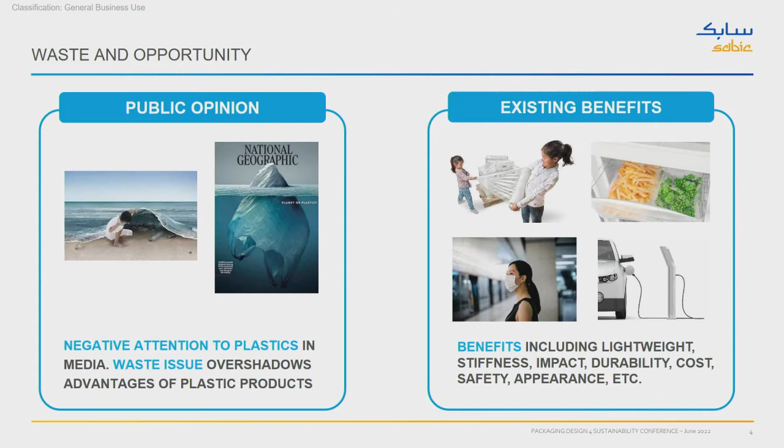Food packaging, you also see that here in the picture, the parts of healthcare, automotive. So lightweight possibilities. There are a lot of things possible with polymers in general. So it's not all bad. I think there are very nice examples in the market that can be made out of polymers. Of course, we need to work on circular economy. So we have some commitments to that as a supplier of polyolefins in the industry.

To do that, we've set up a program. We call it TruCircle, and it consists of different pillars. We have a portfolio pillar and a service pillar. The portfolio part consists of three parts. One is the mechanically recycled products, which I think was also touched upon. It's the real mechanical recycling of products out of the industry. Wash them, regrind them, and make new polymers out of it, new granules to make new applications out of it.

There are also two other ones, and they are also certified. I'll come back to that later. Certified circular and certified renewable. If we talk about certified circular products, that means if you recycle them from polymer back to polymer, that goes via the chemical recycling route. I'll show you an overview of that. And then you have the benefits. It's food contact approved. It's in spec. It's comparable to virgin resins, and you can make your new applications out of it.

Certified renewable, that's a different way. It's based on a different kind of feedstock. Usually we use oil-based feedstock. Naphtha in this case goes into the cracker, then into the polymerization plant. What we do with certified renewable products is we do not use naphtha as fossil-based feedstock, but we use a renewable feedstock. Most likely in these cases it's tall oil or, for example, used cooking oil.

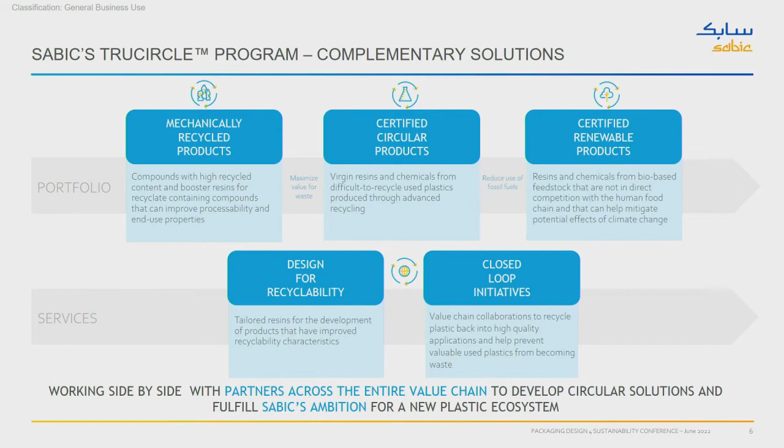There's also closed loop initiatives. If you do mechanical recycling, food to food is, from a legislation point of view, not possible at the moment. But in closed loop initiatives, there are ways to do that, and you can go from food back to food. Think about the PET bottles. There is also some milk packaging in the UK. So we have quite a thing to do in the whole value chain from that point of view to bring circular products in the market.

If we talk about the things I just listed, we also have some examples. Mechanical recycled products, you see there a bag of granules. We use that same bag where we sell the granules in. We take those bags back, we make new bags out of it, and we sell the granules in recycled bags. We call that bag to bag. The point is, the granules inside are not suited for food contact. It's automotive based, for example, but there is a way of recycling your packaging and creating a new one out of it.

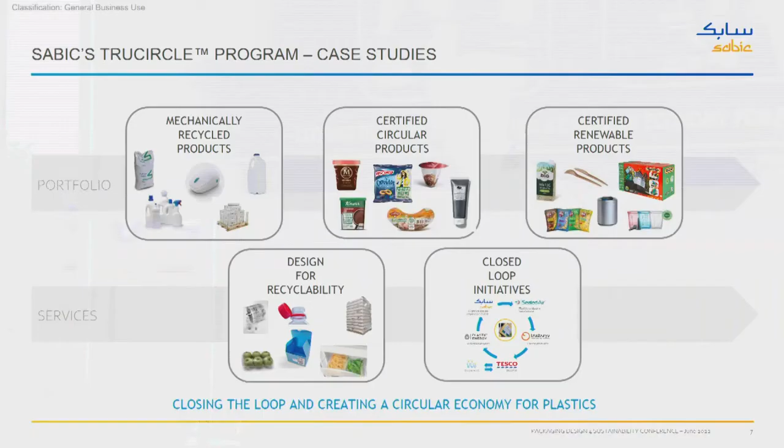You also see there, I hope you can see it, a mouse in the middle. It's created of plastics coming from the ocean. So materials are collected and are made into a new mouse. It's not food, but it's out there in the market. Of course, mechanical recycling, the whole bottles. I think that is known. And as I touched upon before, mechanical recycled stretch film used in the market.

There's also the part of the certified circular ones, based on the chemical recycled polymers we have. You see the Magnum cup, for example, on top there. There is also fish packaging. There's different ways where we can use advanced recycled products from polymers back to feedstock, back to new applications.

Also certified renewables. You also see some examples on the pages. I think they speak for themselves. There is extrusion coated paper, maybe not so good, a paper-plastic combination from the recycling point of view, but still there are people buying this and putting this in the market because of the CO2 footprint.

Services, as I mentioned before, design for recyclability. In my case I do application development, we try to develop new structures, new packages, new ways of combining polymers so that they are easier recyclable. We have some examples in here. It's a PVC-free cling film. It's an EVA-free stretch hood. So we try to design the whole package, the application in the end, so it's easier to recycle it in the next step.

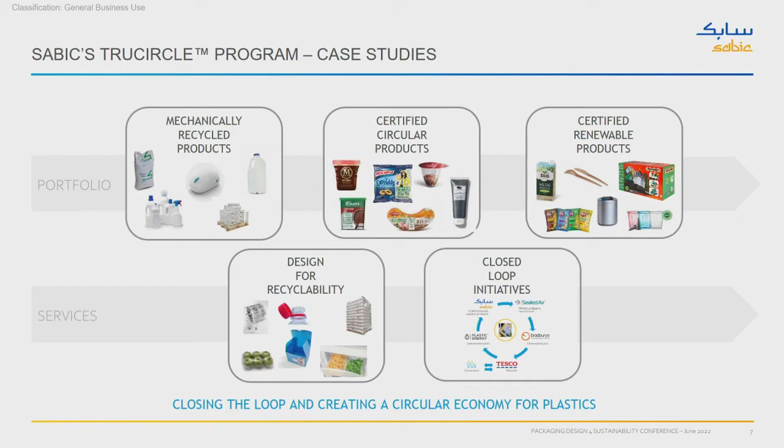Closed loop initiatives. I briefly touched upon that. You see that also here in the picture. It's a food packaging made by Sealed Air, goes into Tesco, is collected again and is then recycled food back to food packaging.

The point of the concept from linear to circular. What you see here on the picture is a schematic overview in principle of the process we talk about in our industry. You see on the left-hand side fossil-based feedstock. In this case, usually that's naphtha in our crackers. It goes into a steam cracker and then into the polymerization plant. So based on the oil, you crack it, you make small molecules out of it, and we polymerize them into bigger molecules.

Polymer plant, we have the granules, we sell them, and somebody makes a product out of it. Injection molding, extrusion, whatsoever. Converter makes a product and sells the product into the market. The product is used by the consumer. The consumer opens it, eats their salad, eats their sandwiches out of it. And then you throw it away. And then the interesting part starts.

Usually we had the energy recovery principle, burning it, bringing it back to CO2, or landfill. And that is a thing we do not want to have. So mechanical recycling is a great alternative: if you sort your waste properly, collect it properly, clean it, you can make a new product out of it. The problem you have in that case is it's not suited for food contact. As an alternative to that, we have, let's say, the bigger loop.

As alternative to that, we have the part of renewable feedstock, the bio-based feedstock, used cooking oil, tall oil from the wood industry, as alternative to naphtha. So we have in principle then two ways of putting a feedstock into the cracker. Three ways, you can say: from fossil-based, we go through the system, we go back in there, or we use a part of renewable feedstock that goes back into the system where we can repolymerize this and make new products out of it.

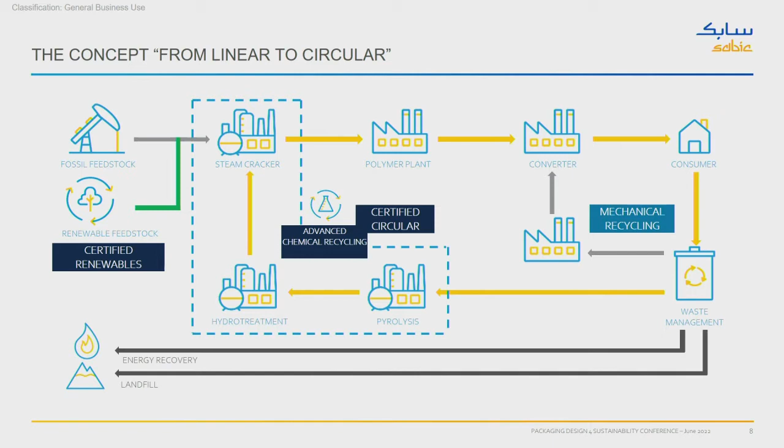Mechanical recycling, I just touched upon that. If you can mechanically recycle it, please do so, from a cost point of view, energy efficient point of view. But there is a lot of packaging out there. If you talk about food packaging, if you take the volumes, non-food versus food packaging is, I think, slightly bigger. Not to underestimate it. But if you mechanically recycle it, you cannot go back into food packaging. So, chemical recycling or advanced recycling gives you an alternative in that case.

If we talk about recycling, whether it is chemical or mechanical recycling, your packaging should be suited to be able to properly recycle it. There are some guidelines. I think everybody is aware of that, at least I hope. We don't want darker colors. We want not too many fillers, as was also touched upon before. The polyesters, polyamides, the multi-material combinations out there in the market are not preferred from that point of view. PVC, polystyrene are things we do not prefer to have in these routes.

It's the whole discussion on paper versus plastics. We have paper, we have coated papers, we have these packages with a plastic sort of window in there. Is it plastic? Is it paper? Where to put it? So there are some guidelines set up. CEFLEX has put some guidelines in place. Also Tesco has done that, and I think Tesco has done it in a nice way, in an easy way.

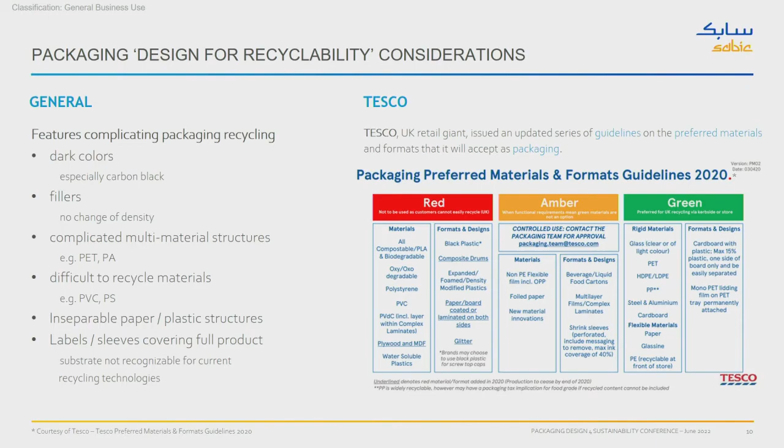It's like a traffic light, red, green, and amber. I think we all know when to cross the street and when not to cross the street. The green parts are the materials we prefer to have used, because then we can recycle them more easily. Amber is only needed when there are no alternatives, and red is the ones preferably not to be used.

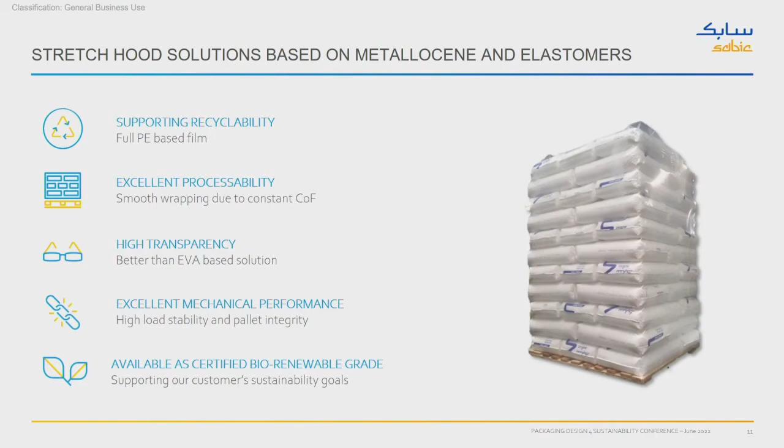PVC-free cling film. If you look in the supermarkets, there is packaging, there are apples, there are fruits in a tray, and there is this nicely elastic film. People know it also from the household wrap. If you have some leftovers, you put this film on top of it. In the household, what you use at home, the majority is polyethylene based, but in the industry, the broccoli packaging, for example, the majority used there is PVC based.

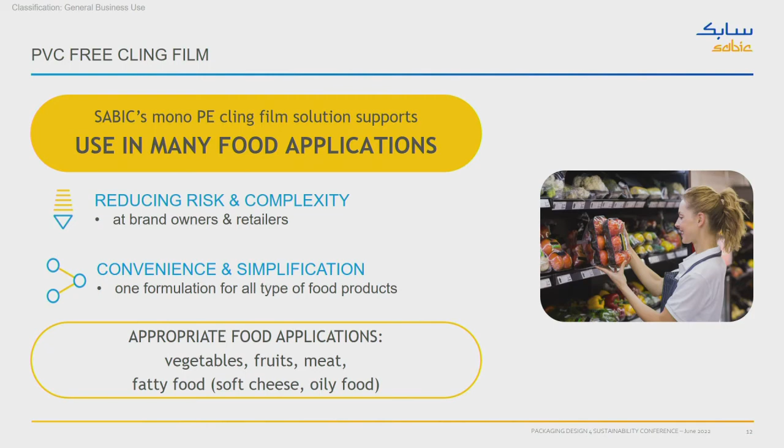And if you do recycling, PVC, the chlorine is a thing we do not prefer to have in the market. So what have we done? We've developed a PVC-free solution, also based on the polymers, that is suited in this market. So you can use a film in the industry, PVC-free based cling film. Of course, the clear food contact approval and so on is all there, is all given. It gives you some convenience. There are different types of PVCs depending on what you're packaging. We've developed a solution suited for all types of packaging.

Brings us to the next topic, design for recyclability. There's a lot of laminates out there in the market. I think we all know those, at least I hope. So what have we done? We've developed a new resin suited for biaxial stretching. I'm not sure if you guys are aware of MDO films, machine direction oriented films. There is also the BOPP, there's the BOPET, biaxially oriented polyethylenes, the PPs, etc. So a majority of those markets is out there.

What have we done? We've developed a new resin, polyethylene based, that can be stretched in two directions. Is that something special? I would say yes. It's not that straightforward. Also, Mila talked about the BOPE in the Musepark consortium. We're also part of that in the life cycle assessment, and also the BOPE is used in that case. What do you usually do in BOPE? You make a cast film. You see it's a relatively thick cast film.

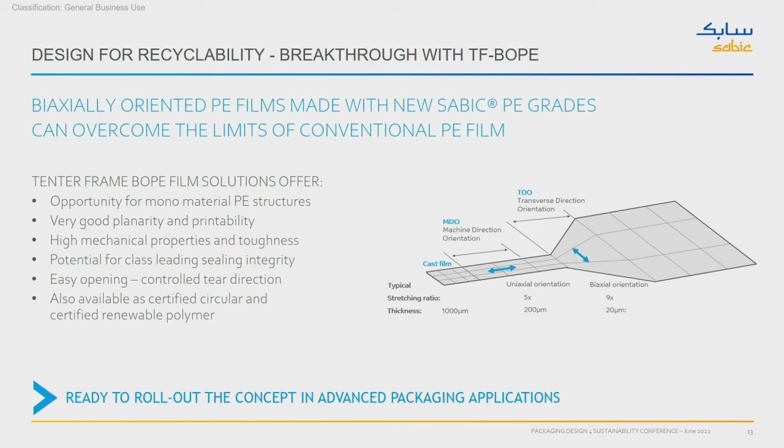It's stretched in one direction, machine direction, roughly 5 times, and then in a tenter frame stretched in TD direction, and then you go from, let's say, roughly 1,000 microns to 20 microns. So you have a very thin film. It's a very transparent film, a very strong film. Stiffness toughness balance is there, and it brings you, I think, very nice possibilities. This runs on commercial BOPP lines, so there's no need from that point of view to invest in new equipment. You can make use of the resin on your existing equipment in case you have it.

But then we need to do something with this film, this biaxially oriented film, and one of the topics is stand-up pouches. I think we see them out there. We have the ones for dishwash tabs, we have nuts, we have soup, we have liquid soap, you name it. The whole refill packs, it's all in this stand-up pouch. And that's, I think, an interesting market, an attractive market to use these oriented films.

If you look at that structure, if you try to simplify it, usually there's an oriented film on the outside. It's represented here in the red color. It has some properties, some needs. Usually what you see on the shelf, there is a print on top of it, so it functions as a print carrier. It brings you stiffness, it brings you optics, the shelf appeal, the appearance. It has to be glossy, it has to look nice. This usually comes from your outside layer, your oriented film. There's a print on top of it. We call that reverse printing because you look from the outside through the film to the print, so the print is protected from that point of view.

There's an adhesive in the laminate, and then there's the inside of the film. In this inside of the film, we bring differences with respect to mechanical properties, because if you take your soup package home and you drop it, you would like it to stay in one piece, otherwise you have some cleaning to do. You need to be able to properly seal it, so your mechanical properties need to be there. Shelf life has to be there. We also touch upon EVOH as barrier properties, because the food you buy should stay fresh for quite some time.

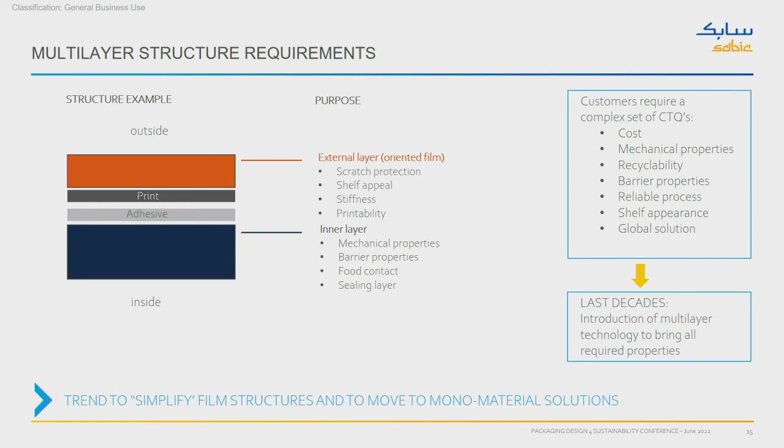If you then think, okay, I used to have my polyester laminate against the blown PE. Everything is fine. I just translate that back into an oriented polyethylene with my same blown PE. But then you see, I have holes in the film when I run this on a packaging machine. So actual testing, sealing of a film. There's a heat seal bar on top of that. You seal the film, but you seal through the film, and that's the thing you don't want.

What is the problem? I think it's very simple. If you look to the melting point of polyester, roughly 260 degrees, polyethylene on the inside, 120 degrees. So you have a delta T in melting temperature between outside of the film versus inside of the film of, give or take a few degrees, 100, 140 degrees. So your packaging process from that point of view is relatively robust. You can more or less do whatever you want.

So if you apply the heat on the outside, the polyester protects the rest of the film. Then you melt on the inside of the film, these dotted lines here. And then in principle you seal the blue layers on top of each other in the traditional way. If you change that to polyethylenes, BOPE against the same blown PE, then this is what we see. And it's also logic, because melting point of the outside of the film is roughly 120 degrees. Inside 90 degrees gives you a delta T of 30 degrees. So your processing window is much narrower.

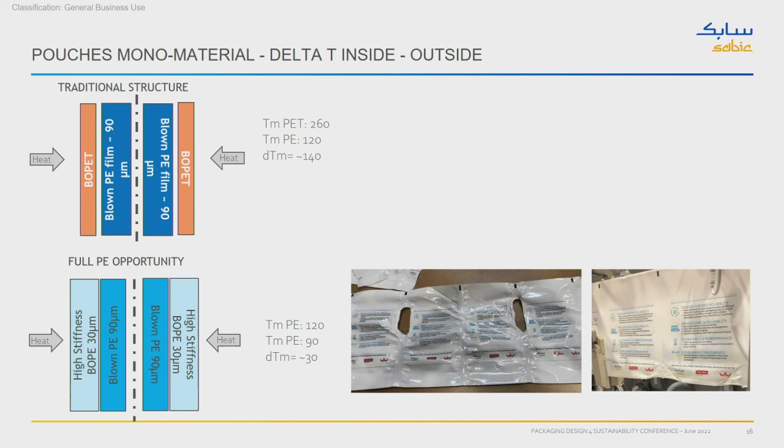And that is what we've done. You see some examples here. Designed for recyclability. Why? It's a monomaterial solution. We call it at least a monomaterial solution. Yes, there is an adhesive in there, true, but it consists of the oriented film, oriented BOPE on the outside, and a blown PE on the inside. And by that, we have a full polyethylene solution.

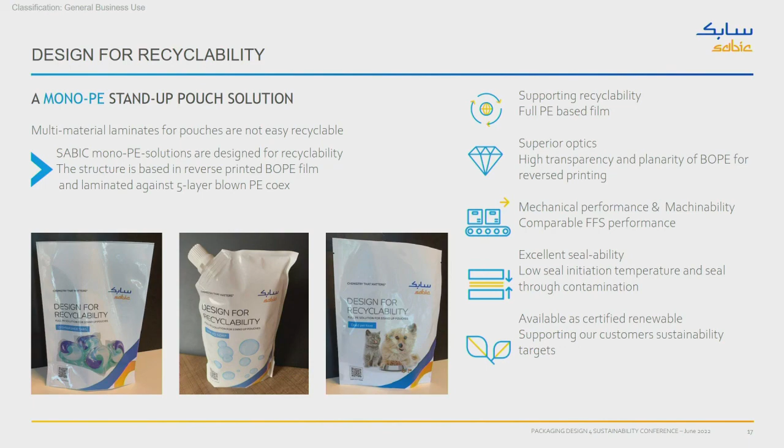That one is suited for mechanical recycling, and is also suited for the advanced chemical recycling. Why? It's only polyolefins. So we can recycle them easier in mechanical as well as in advanced feedstock recycling way. Yeah, that's roughly some steps we take from application point of view: how can we translate a traditional polyester PE into a full polyethylene based structure to have a monomaterial stand-up pouch. And I think by that I've reached the end of what I prepared for today.